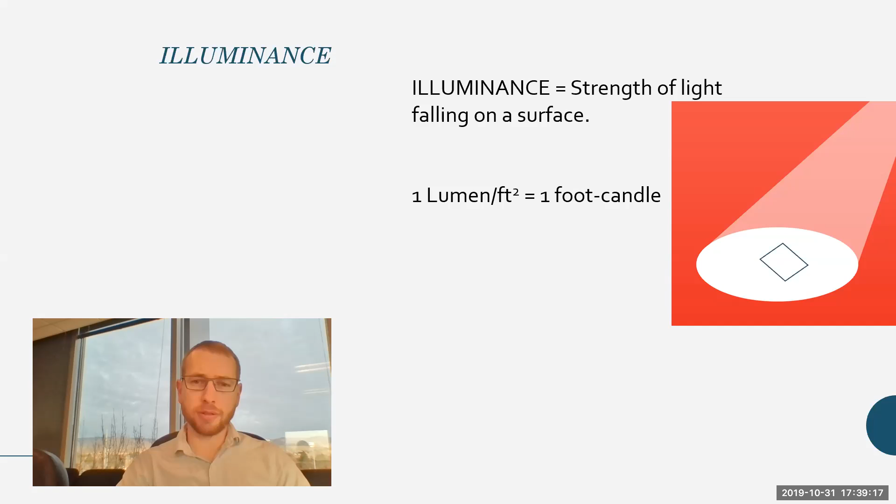Let's remember illuminance, the strength of light falling on a surface. We measure that in terms of lumens per square foot, or foot candles, or in terms of lux. 1 foot candle is 10 lux. This is just the amount of light actually falling or hitting a surface, and we can measure that with a lighting meter.

Most lighting meters that you purchase or might use are designed to measure the illuminance. So you can set it on a desk and figure out if the workers have enough light for their particular tasks. They're pretty simple. Here's one.

All you have to do is basically turn it on. It's going to run through a little self-test, and now it's showing 0 lux. I can switch between lux and foot candles. I'm going to leave it in lux for now. Then I can take off this little black cover, and we can see how much light is falling on the desk. It's looking like around 624 lux, 630.

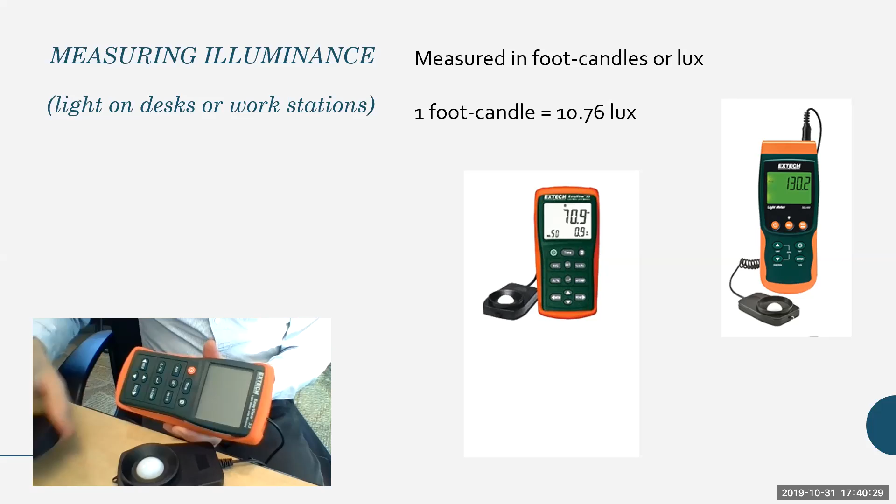Well, now that we know that, what does that actually mean? Is that enough or not? Let's look at some standard values.

A warehouse, you don't need a whole lot of light generally, so the recommended level—this is not code, these are just recommendations out of the IES, or Illuminating Engineering Society—warehouse is on the lower level, 50 lux. Production line, so processing things, that's 500 lux. If you are actually visually inspecting items during manufacturing, reading labels and such, that is 1,000 lux. For office or typing, you'd be at 1,500 lux.

So I was measuring about 630 lux. That's a bit low for office lighting, but for me, this space feels very well lit. I feel like I have plenty of light. So a lot of it comes down to personal preference.

These are just guidelines, and they can really vary by 50% or so. So for office typing, it can be all the way down to 750, or in my case around 630, or up to say 2,000 lux. Once again, these aren't code levels, but if you walk into a warehouse and you're reading 2,000 lux, you know that you might be able to get away with using fewer lights and still get the job done. So keep hold of these values.

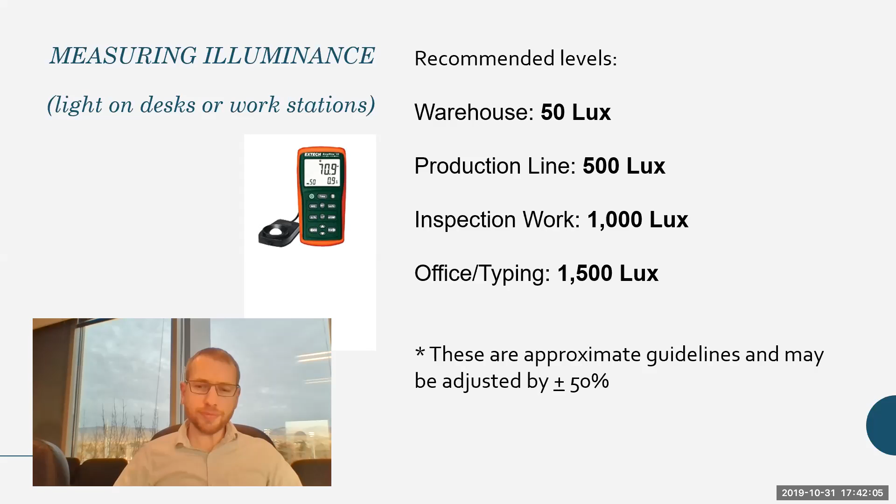And if you're measuring it in terms of foot candles, it's pretty easy to just reduce the value by a factor of 10. So 50 lux is 5 foot candles, 1,500 lux is 150 foot candles. Good things to reference as you are doing some energy audits.

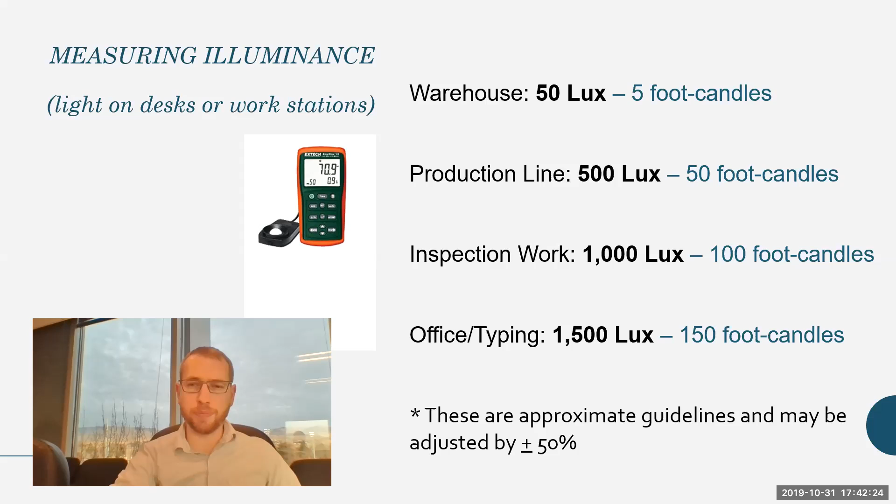The other thing we can measure, of course, is luminance. This is the strength of light that is measured directly—light that is directly hitting the eye. We measure that using a luminance meter. This looks like basically a little ray gun, and it works just as you'd expect. You can take off the cap and point it at a bulb, and the brightness is measured in terms of candelas per foot squared or candelas per meter squared.

Now, there aren't any official guidelines for glare. If there's a really bright spot in the office, people are aware of that, but there's no code mandate against it. What this is very helpful for, though, is measuring the strength of an actual light bulb and how that light bulb is performing.

Because over time, light bulbs will degrade. Here's a graph of a high pressure sodium bulb, a cut sheet taken from a typical lighting supplier. You can see as the light bulb ages, the amount of lumens it actually outputs falls with time. So you can use one of these meters to determine where that bulb is in terms of its initial performance versus its actual performance.

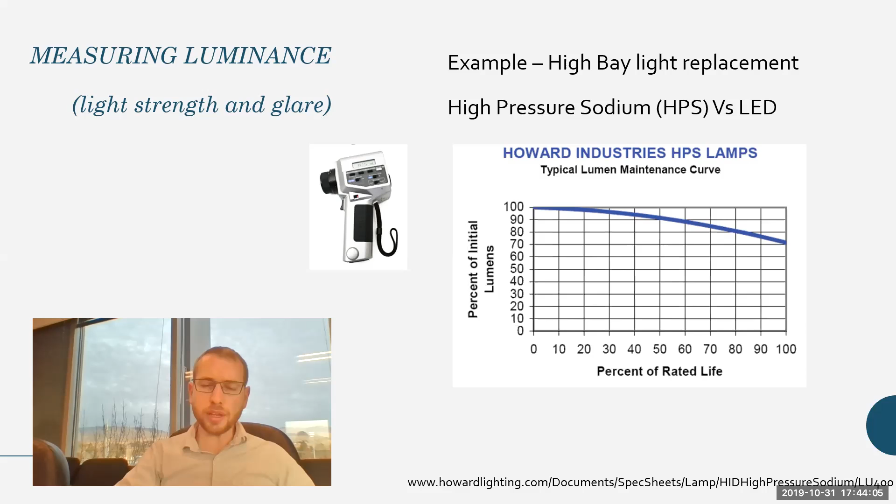That's something that's important to know if you're doing any upgrades or life cycle cost analysis, considering the spec sheets of different lamps. So let me pull up a couple of spec sheets as an example. Let's minimize this and zoom in.

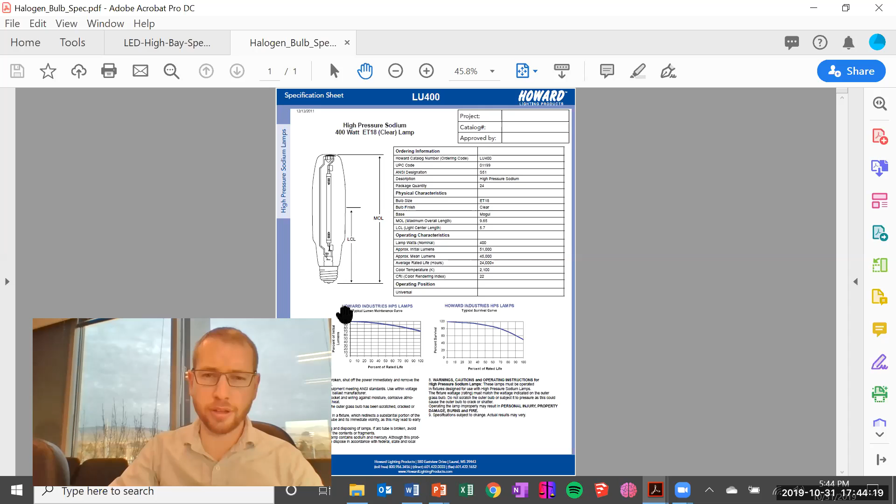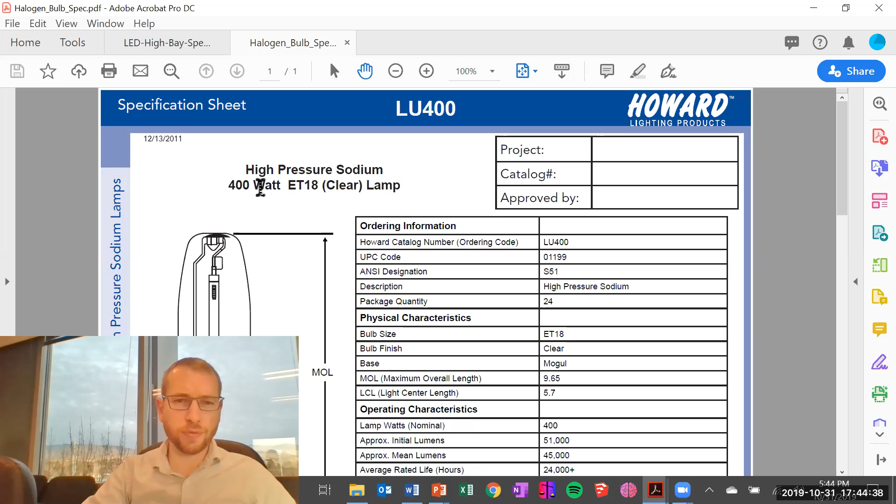So in this particular example, we've got a high pressure sodium lamp. This is just online from Howard Lighting Products. You can see it is designed to give off 400 watts, and the initial lumens that it produces is 51,000 lumens.

Now these lumens might go off in a whole bunch of different directions. So to actually measure the illuminance falling on a surface, that's when you would use a light meter. Over time, it degrades, and the mean lumens it gives off are 45,000, with a rated life of 24,000 plus hours. So a little over 8,000, closer to 9,000 hours in a year.

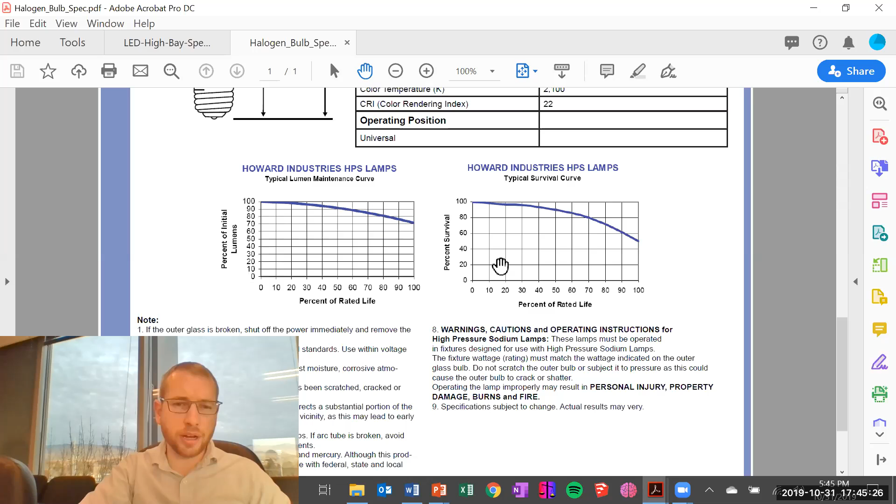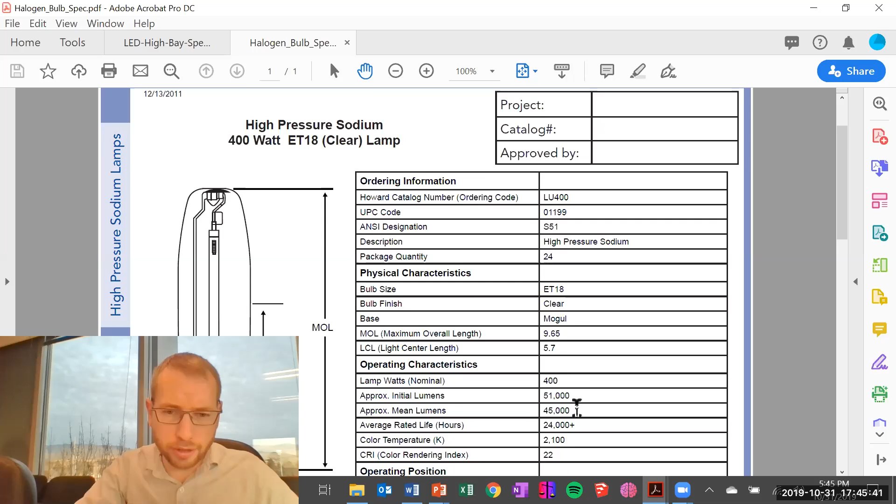We're guessing this light bulb might last 3+ years, and over time it is going to degrade. Some of the light bulbs might even fail earlier than its expected lifetime. So if we were to replace this, let's look at the other piece, the color temperature: 2100 Kelvin. If we were to look back at our chart, let me find the correct slide.

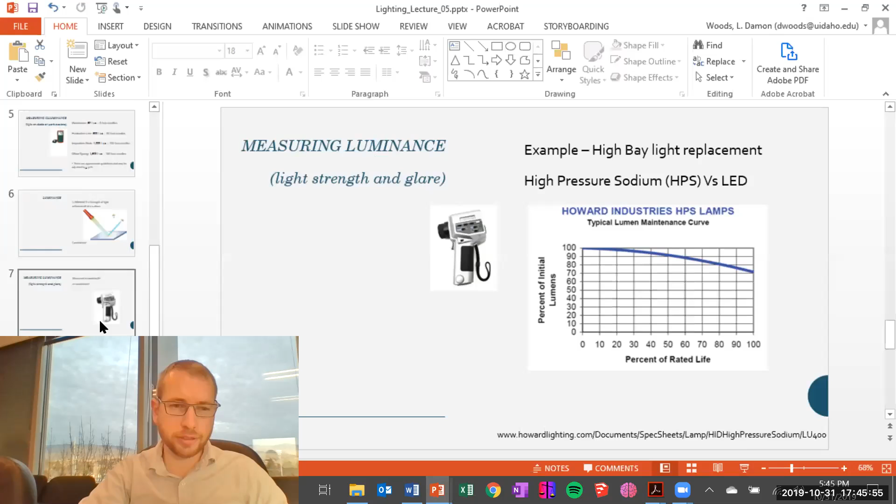Let me pause here for a moment. All right, now we're looking at the right chart. The spec sheet said that the light from the high pressure sodium bulb was giving off 2100 Kelvin, so that's a very orange light.

Now if we wanted to replace that, I've got a spec sheet from an LED bulb. This LED light replacement's specifications show it only draws 150 watts. It doesn't produce as many lumens, only 15,000, but it might still produce the same amount of illuminance on the surface since those LEDs are so directional, whereas the high pressure sodium might be casting those lumens in a range of different directions.

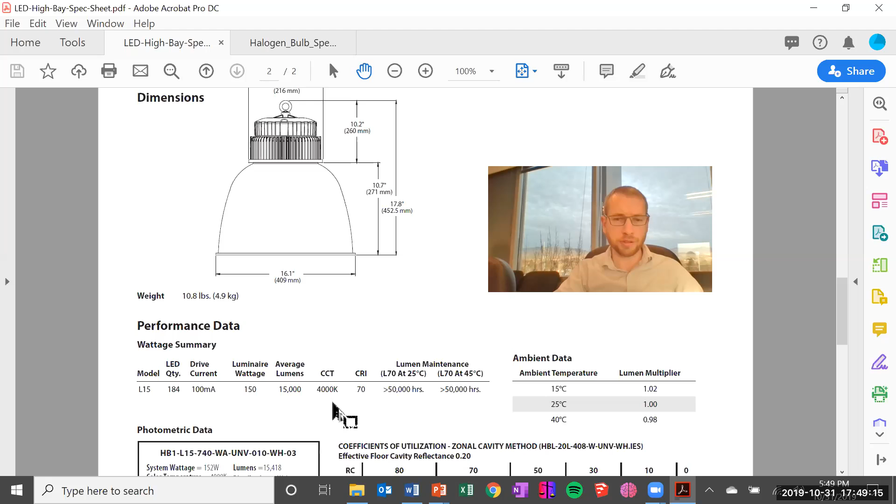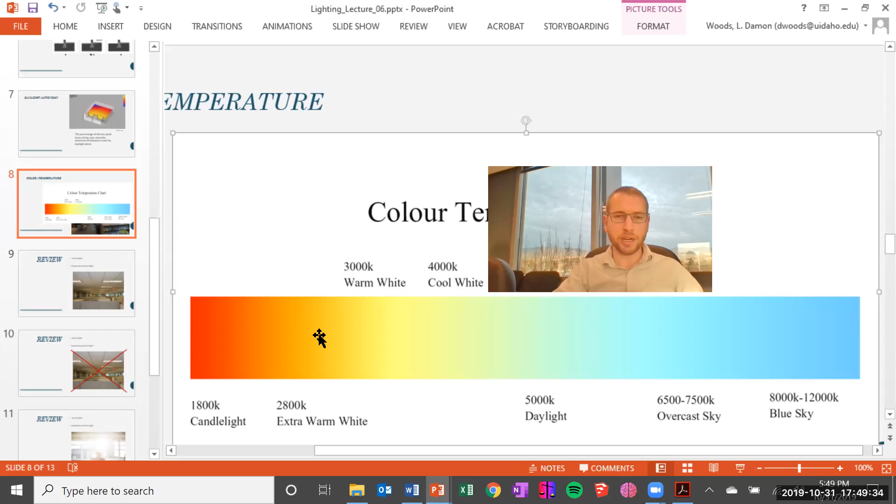And its color here is at 4,000 Kelvin. So let's look back at that chart. 4,000 Kelvin is a much brighter, cool white, as opposed to that sodium, which was that very orange color. So it might be a really nice upgrade, it might not, but those are the factors you're going to be looking at in terms of replacing a light.

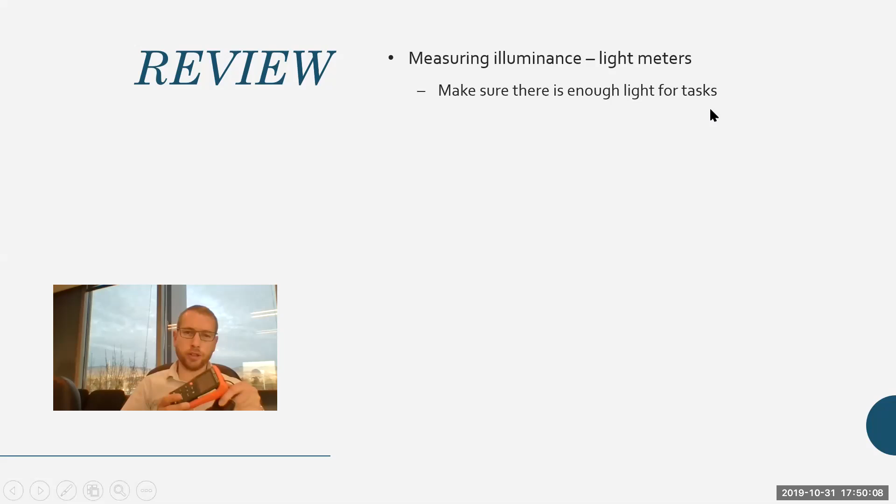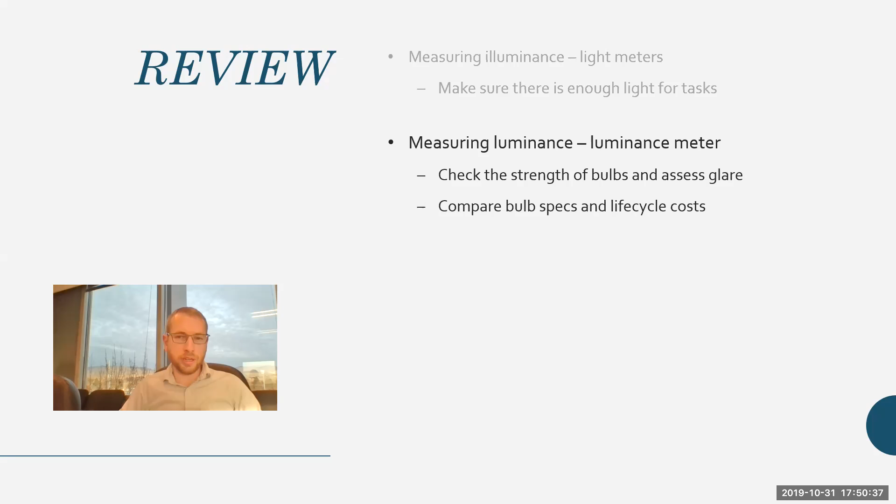All right, so a recap on this quick unit: you measure illuminance using a light meter to make sure there is enough light on the surface for people to complete their work tasks. You measure luminance, the amount of light being emitted from a surface, using a luminance meter. And you need to look at the spec sheet for the actual bulb as well as the ballast to see if it is going to produce somewhat comparable luminance as well as color spectrum.